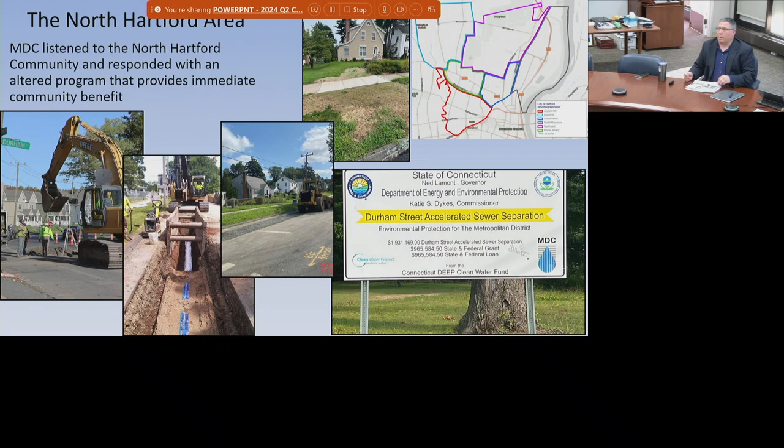The goal was met, and really was met on Durham Street. So just some pictures on this, just highlighting some of the construction progress as Durham Street progressed along. While not completed in quarter 2 completely, Durham Street Public and Private has been done well ahead of the milestone, which I'll get to later on in this presentation.

Shown on this slide is the 4 requirements that we have to present as part of our consent order quarterly updates. There's no changes from prior presentations, as there's no specific requests from DEEP for any special items.

This slide is our project status and schedule update as of the end of quarter 2. A couple key things: you'll see there's 3 projects shown in green. Those projects are the lining on Bloomfield North Branch Park River area, Durham Street's right-of-way work, and the Woodstock Branford Street area right-of-way work. Also of note, while they're complete, they're shown well ahead of the red diamonds to the right of them. That means they're ahead of schedule in regards to the consent order deadline.

You'll also see on this slide we've updated the color scheme to show projects that are in design and when we expect them to go to construction. There's 3 projects on here that are shown as going into construction quarter 3. So you would expect when we give that update in December, those projects will be shown in construction.

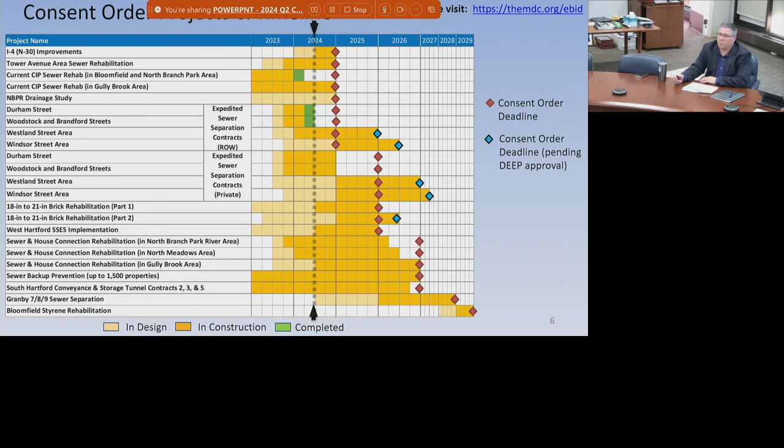Excuse me, sorry. This slide has not changed as far as what extra work has triggered the request for a milestone update with DEEP. We're still working with DEEP on those schedule adjustments.

We've consolidated what was 3 slides into one, as the quantities and the reasoning has not changed. We have added a table on this slide that shows the current milestones for projects that we're asking for changes in schedule on, as well as the proposed schedule change dates.

The projects on here are the Westland Street and Windsor Street projects as far as right-of-way and for private property work. And then also the 18-inch brick project, which I'll get to in a second.

Currently, right now, the Westland Street project is in construction, the right-of-way work that is. So we do still expect that project to complete by the end of 2025. The Windsor Street project is in design, and we expect that right-of-way project to go into bidding the end of '24 or early 2025, with that project completing construction the latter half of 2026.

And then for the 18-inch brick project, due to some complexities within the scope of that project, we split that project into two parts.

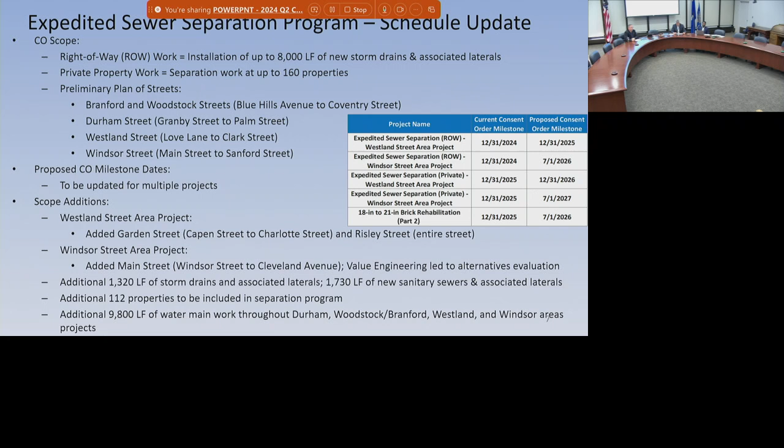The first part is in construction now, and we expect it to be complete in early 2025, well ahead of its end of 2025 deadline. The second part of the project is in design right now, and we expect that to go into advertisement for construction in early 2025. That's why that project has a request for an extension. So we're essentially splitting a project into two parts because of the milestone management.

Shown on the next two slides are some construction photos, just some progress updates through Q2. This slide shows some work on Durham Street, including a new manhole install that was done for the storm drainage that we put in, a water service renewal.

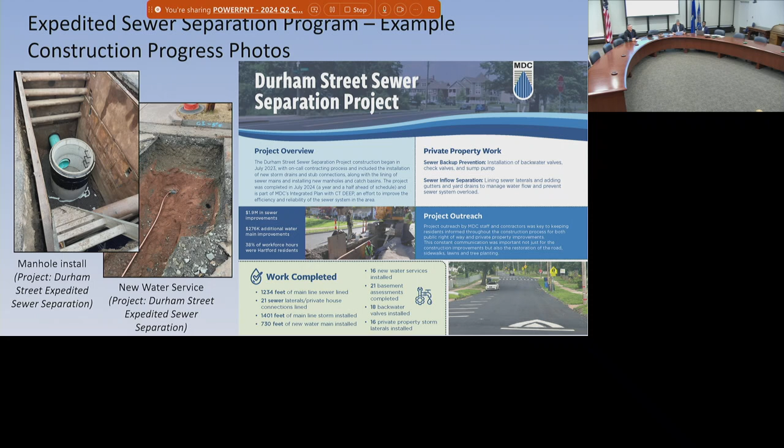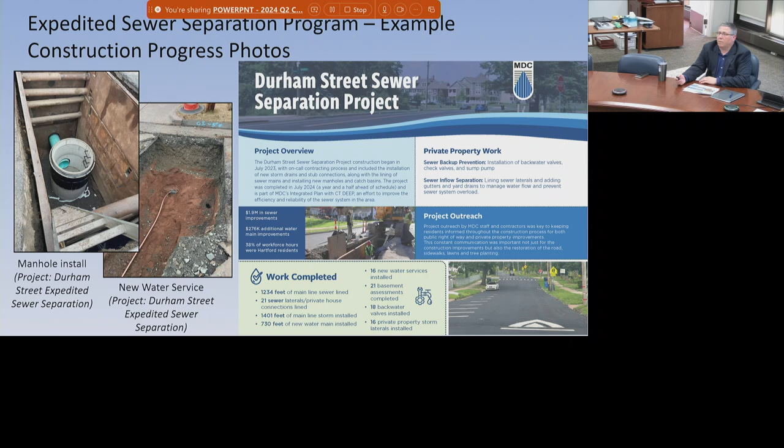And then we've also, when we completed the Durham Street project, obviously in Q3, not completing Q2 for public and private, we came up with this fact flyer that we introduced at our board meeting, and it was available for the public. They wanted us to see what the project statistics were, its schedule, and what went into the project, highlighting it. We've added that to this slide for PR and for the public to see.

This second slide shows more construction progress photos. It says CIPP work, that's cured-in-place pipe, which we routinely refer to as lining work. So you've got some lining work photos in the North Branch Park River area on the left-hand side, two of them. One shows the liner coming off the truck, and the second shows how that equipment is used to insert the liner into the manhole.

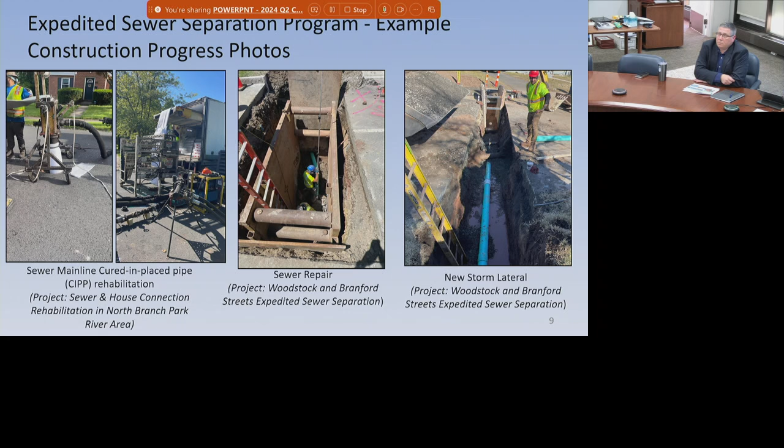And then in the middle, you've got a sewer point repair on the Woodstock Branford project area. Followed by that, you've got a picture showing a new storm lateral being installed also in the Woodstock Branford project area.

This slide hasn't substantially changed from prior presentations in its format or content. However, we did reformat this slide based on some feedback we received, so all the neighborhoods are lumped together and it's a little easier to see. We've also kind of extended the screen a little bit.

More importantly, you'll see 3 projects are highlighted in green. Those 3 projects were completed in Q2. Later on, in a couple slides, when we get to the CSO reduction or CSO overflow reduction progress, the values from this slide, whether for the 1-year storm or our typical year, were then used to update those metrics, and you'll start to see progress over time as more projects show up as green on this slide.

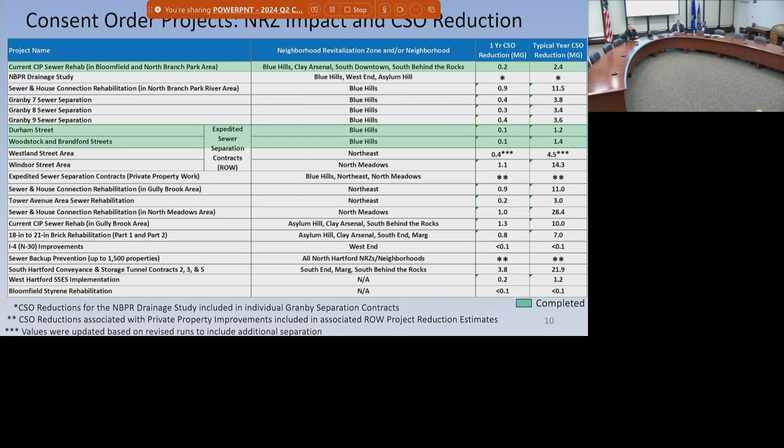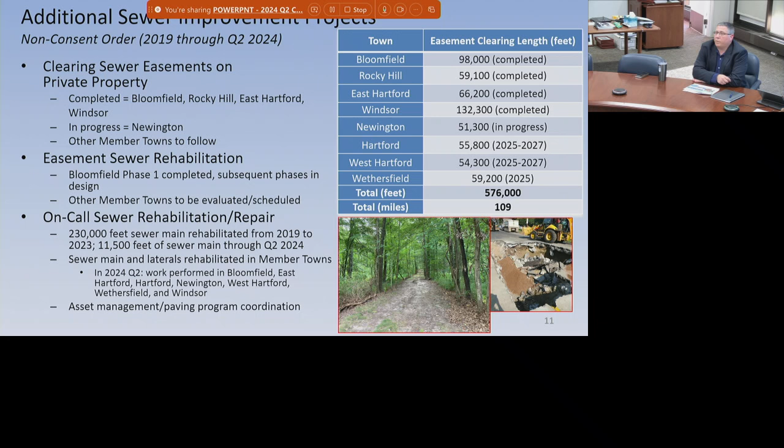And then outside of Hartford, or outside the consent order, in Q2, the key points were that we have now lined almost 2 miles of sewer main on our on-call sewer program, that's shown underneath the 3rd bullet.

And then the other key highlight in Q2, in the easement sewer rehab bullet, while Bloomfield Phase 1 has been completed for easement sewer rehab, we've now started design on the subsequent phases, and that project is expected to continue design through most of 2025, and then go into bidding. It's going to be a large sewer rehab project that'll complete all of our sewer easement areas in Bloomfield.

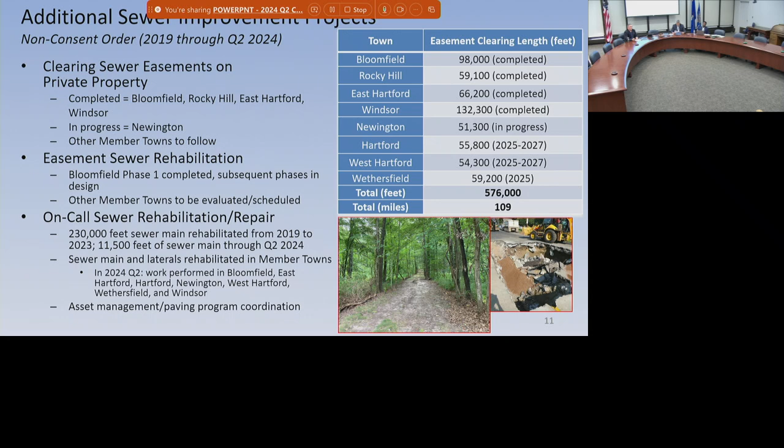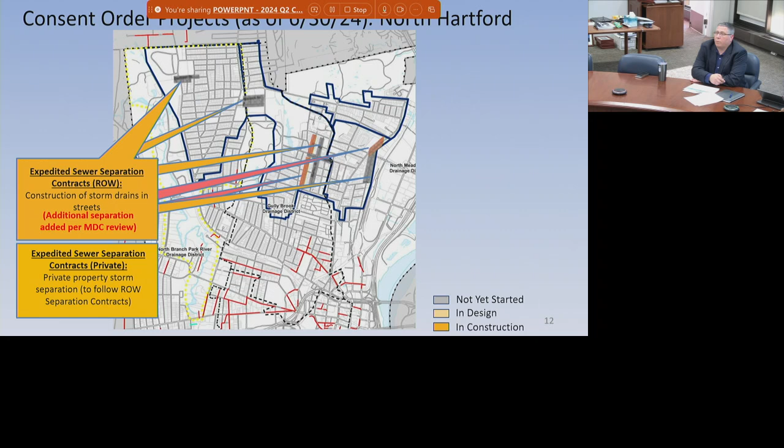The Tower Avenue area is still in construction, but is expected to complete in Q3 or Q4 of 2024. Moving ahead, we've got the North Branch Park River area sewer project, that's in construction and will be in construction through some portion through 2026.

The North Meadows project area has now gone into construction and will finish up in late 2025. Then we've got the Gully Brook area, which as of the end of Q2 had not yet moved into construction.

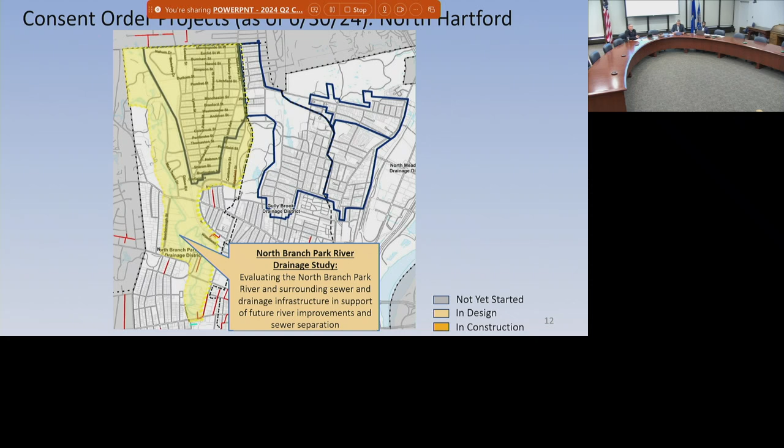Finally, we've got the North Branch Park River area study. I have a slide dedicated just to that, so I'll go into more details when we get there. Subsequent to that study is the Granby 7/8/9 sewer separation area. The design or start of design of that is really going to be predicated on when the study is complete and all the recommendations and key decisions are made.

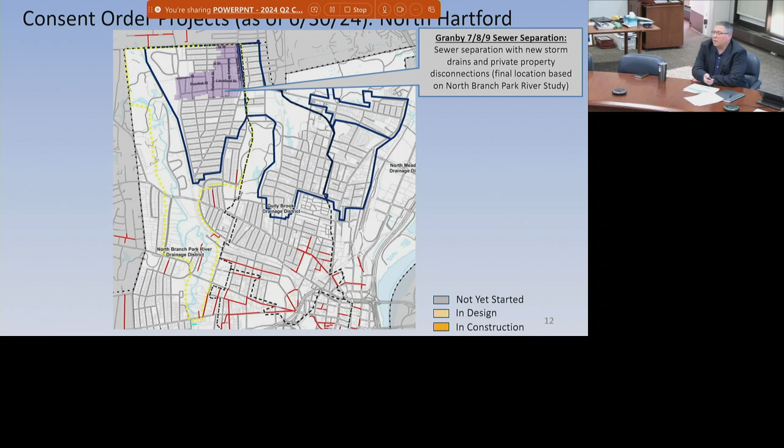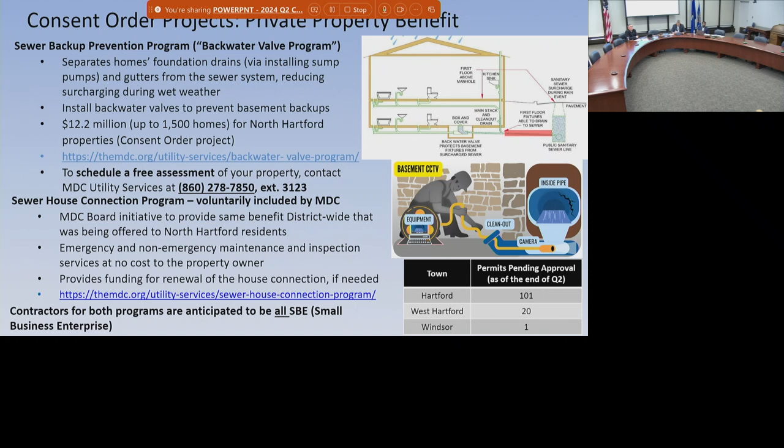We did add a table to this slide showing pending permit approvals. When the district does private property work, each individual property requires a permit from the local building officials to get that work accepted and then progress through construction. Some permit applications are older or younger than others, but through the end of Q2, we are still waiting for a number of permits, mostly in Hartford because that's where most of the work is occurring right now. Until those permits are issued by the local municipality, that private property work cannot proceed.

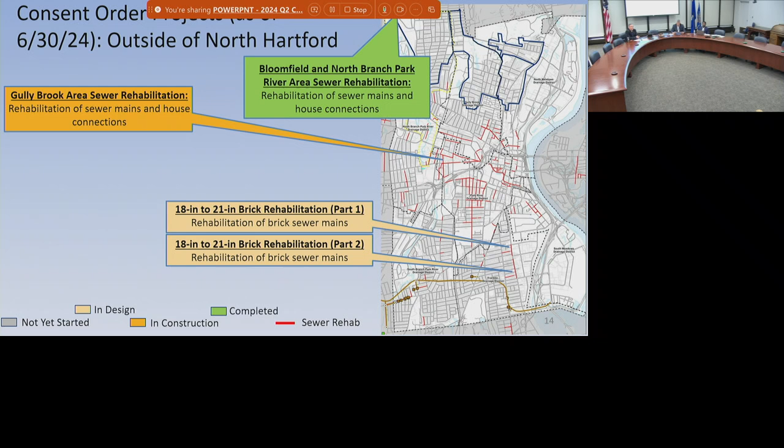We've now got the Gully Brook area sewer rehab project shown in the middle. It's not the same as the large gully area we showed, as this is a little more south of North Hartford. That's still in construction. Then we've got the Bloomfield North Branch area sewer rehab, a separate project from the North Branch Park River area project, and that project is now complete. You'll see it on the next slide again because it shows up in two different towns. And the tunnel is still in construction right now.

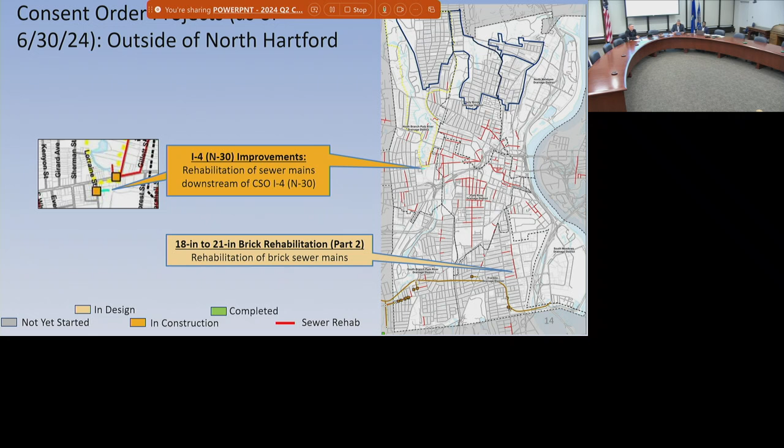Moving along, N30 has now moved into construction. It's a small rehab project off of Farmington Avenue. That's the collective of the group outside of North Hartford.

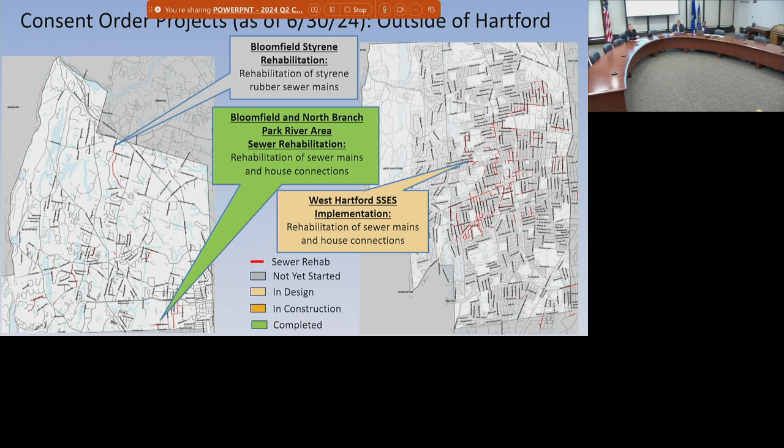Moving into projects outside of Hartford that are consent order projects, the only change is that Bloomfield North Branch Park River area is now complete. As of the end of Q2, West Hartford SSES had not yet moved into construction.

Now to talk about the North Branch Park River area study. Within Q2, some key activities were completed. CDM Smith, the consultant working for the city and the district on this project, presented its preliminary findings to both of us in Q2, with multiple presentations given to staff as well as to senior management for both the city and the district, and also to the Greater Hartford Flood Commission.

Within that presentation, they showed some options for the district as far as sewer separation work with possible new outfalls that might be required, as well as some recommendations to the city of Hartford for capacity improvements the city should consider implementing within the North Branch Park River area corridor.

The final reports that'll give more detail to those recommendations, as well as cost estimates, are due to us, both the city and the district, in Q3. Once those reports are submitted, both the district and the city will review and have to make decisions as to, on the city side, what improvements it will choose to do and when for the river. Correspondingly, the district will have to decide whether or not new outfalls will be needed, and whether or not those projects will proceed and on what schedule.

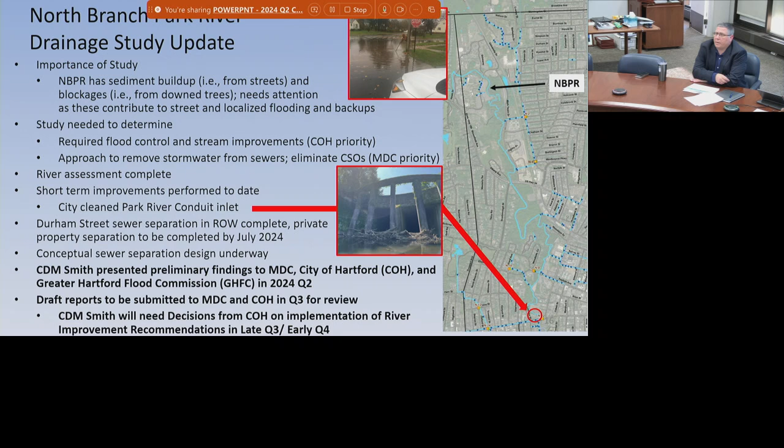The next two slides follow the same format as the prior presentations. However, you'll see significant increases in quantities of work in Q2 compared to Q1. District-wide, we doubled our backwater valve installations in Q2 compared to Q1, and quadrupled the number of private property internal disconnects in Q2 compared to Q1.

We now have completed sewer separation work at 16 properties district-wide. Those 16 properties are all in North Hartford, so you'll see that same number on the next slide.

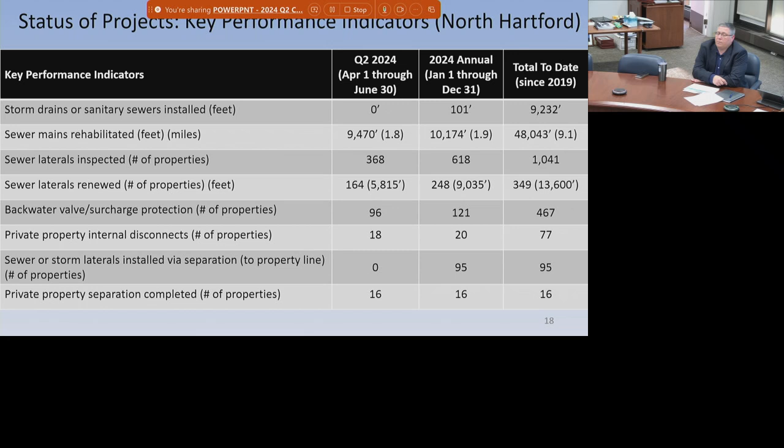In North Hartford, again, the 16 properties that had sewer separation work. We also doubled the internal disconnects compared to prior quarters, Q1, and quadrupled the backwater valve installation work, and the sewer rehab work was also significantly increased, as that number at Q2 is about 9,000 feet higher than it was compared to Q1.

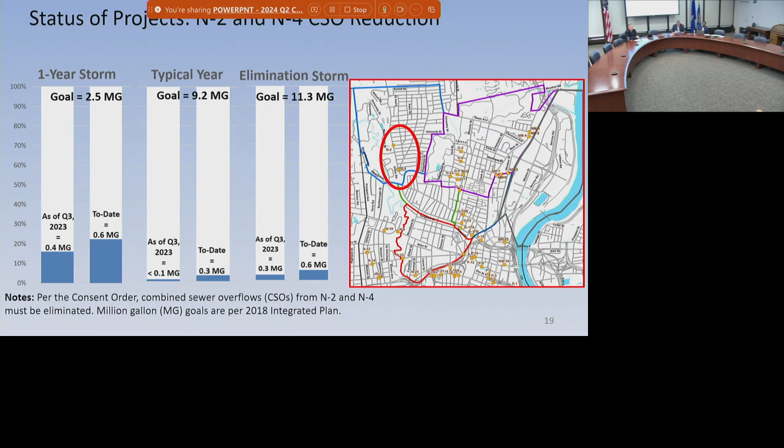Those numbers will continue to jump as more projects ramp up in construction. As referenced on the table with CSO reductions, you'll see increases on this side, which is N2 and N4, and also CSO reductions on the next slide, Gully Brook and North Meadows. We've modified these two slides to show a baseline as to where we were when we started this program in Q3 of 2023 and where we are now. So you'll see slight increases when you look at the one-year storm, the left-hand bar showing 0.4 mg compared to the right-hand bar showing 0.6 mg. That means in Q2, to date, we increased our CSO reductions for a one-year storm by 0.2 million gallons. The same math would apply to the typical year and the elimination storm.

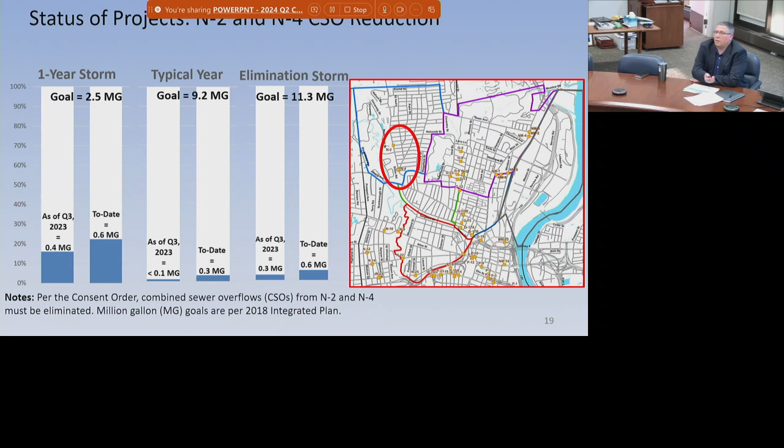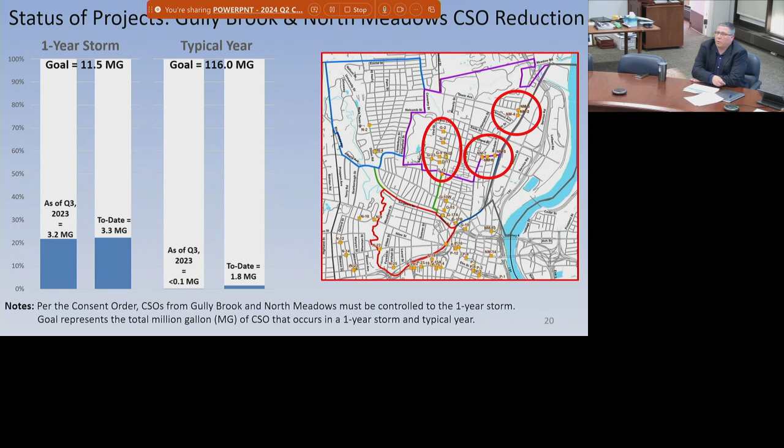In similar fashion, we have increases on Gully Brook and North Meadows. The increases don't look quite as big, in part because not as much work has been completed in these two sewer sheds, but also because the scale of CSO reductions on a sewer shed is much bigger than when looking at individual CSO regulators. Again, through time, these numbers are going to go up.

And with that, I'm going to turn it over to Jeff. Thank you, Jason. So we have great news for Q2.

We made a lot of progress with our community outreach by opening our community outreach office. We had the ribbon cutting event on May 15th. The office is well staffed by the outreach staff and outreach consultants, where they are providing information on schedule updates, activities around improvements on private property, as well as using the office to do mailings, door-to-door notifications, and having meetings throughout the different durations of the project so we can keep residents and businesses up to date. In addition, we're attending the regularly scheduled NRZ meetings to provide project updates and get feedback from the community. If you want any updates on the MDC projects in North Hartford, you can visit our website, themdc.org.

In addition to all the outreach done in that office, we're also doing career development for compliance of the Hartford resident goal, where we do mock interviews with residents who walk in to see who's up to speed, instant matchmaking, or just providing feedback or assistance on what the latest hiring standards are for the market. So we encourage people, if you're looking for work, or contractors looking to do any matchmaking, you can call Carlos Bravo or myself, or visit us at the outreach office.